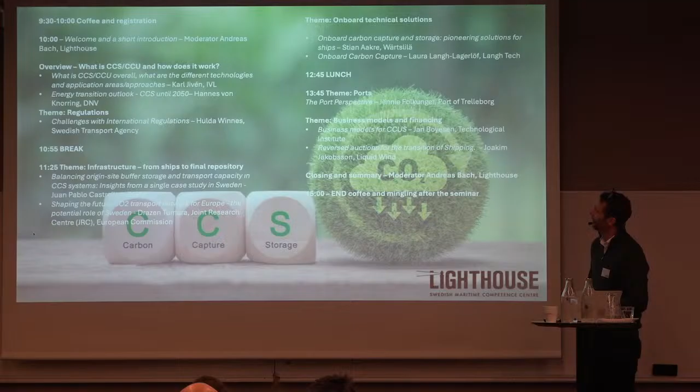I think this will be a really interesting day where we can learn about CCS, both on board and on land. The program today is we have 10 presentations, and in between there we will have some coffee and some lunch and so on. The coffee breaks and the lunch break are quite long, and that's because we really want you to talk to each other. Normally that is not a problem with this crowd, but take the chance to network and discuss with colleagues and so on. And if you get any great ideas, contact us.

So I think that's it, and we will just get started with the day. And first out is Kalle. And he will start with a short overview of CCS in the maritime domain. So please welcome up Kalle. He's already here, perfect. Kalle is a project leader and a researcher at the Swedish Environmental Research Institute, IVL. And Kalle is specializing in the transition of shipping towards sustainable fuels. And also Kalle is running one of the focus groups, fossil-free shipping, which you all are very welcome to participate in. So please go ahead, Kalle.

Thank you. What an honor to start this fantastic day.

So I'm a naval architect, and I've been working with the shipping transition towards more sustainable operations, fuels, and so on. But myself, as well as IVL, have also worked a bit with carbon capturing. Myself with carbon capturing on board ships, and we did, for example, a Lighthouse report that was released almost 3 years ago. And it was about the potential of onboard carbon capturing.

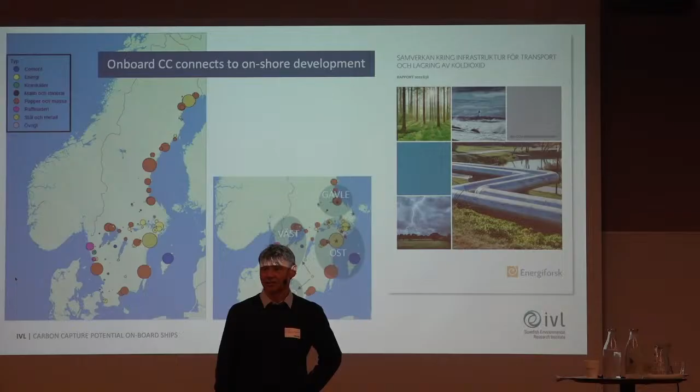If we're talking about the carbon captured on board ships, it would also make sense to look at the potential captured volumes for land-based systems. It would be very costly to build up systems just for the carbon collected on board ships, so you would probably want to find synergies with systems developed for land-based sources. There are already studies today about what kind of systems could be built up, making hubs within ports, and we know many ports are interested in looking at this.

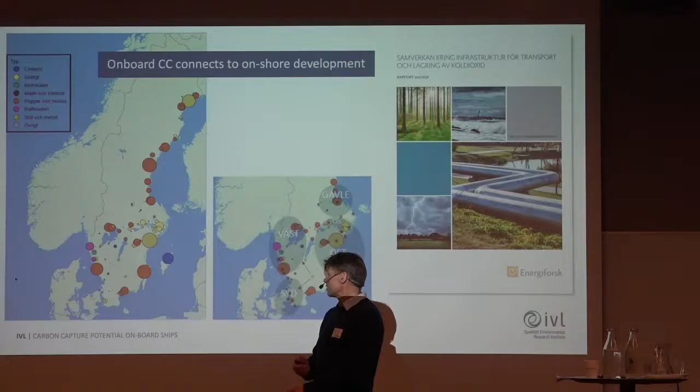Related to the technology, there are many different ways of collecting the carbon dioxide from the exhaust or combustion process. We could collect it before the fuel enters the engine - pre-combustion capture. We could have oxy-fuel combustion, where you burn the fuel together with oxygen, and out of the engine as exhaust you get almost just carbon dioxide, which could then be used. But the most common way is post-combustion capture, and the benefit is that you normally don't have to alter anything within the combustion process - you could use the same engines and just add something afterwards.

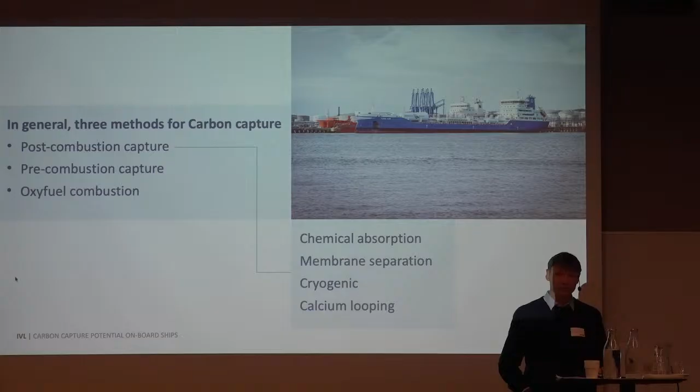But this could also be made in different ways. You could have chemical absorption, use a membrane, use heat exchange in a cryogenic system, or calcium looping. The most common or most worked-with system is chemical absorption, and then you often use some kind of chemical solvent like MEA, monoethanol amine - there are many others as well, which we're going to look at. You could say you scrub the exhaust, the solution captures the carbon, and then you release it in another step. The MEA solution is often used as a benchmark when comparing systems, and it's the most common and still used system.

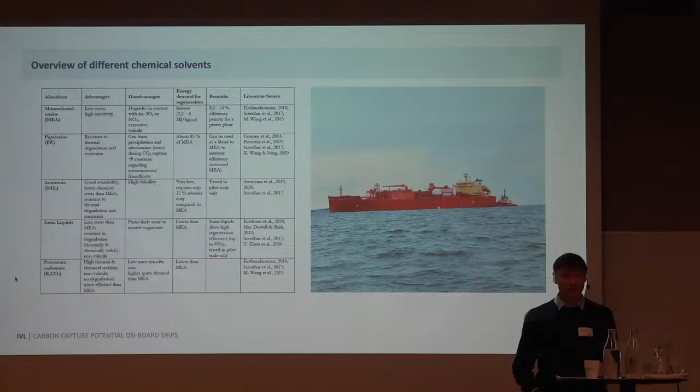But there are many, many other solutions as well, with different pros and cons. I'm not going to go into that, but some are more poisonous, some are more costly, some have better energy efficiency, and so on.

Absorption by solid sorbent and membrane technologies - you could, for example, use a calcium looping process. You have calcium oxide that reacts with the carbon dioxide, and then you get calcium carbonate that could be delivered ashore and used for other processes later.

Within cryogenic carbon capture, you take the exhaust gases below minus 100 degrees Celsius, and then you could loop out the carbon dioxide. It's actually this system that we found the most promising - you have the possibility of less energy used for the process, it might be the most economically feasible in the future, and it could also take up less space than other systems.

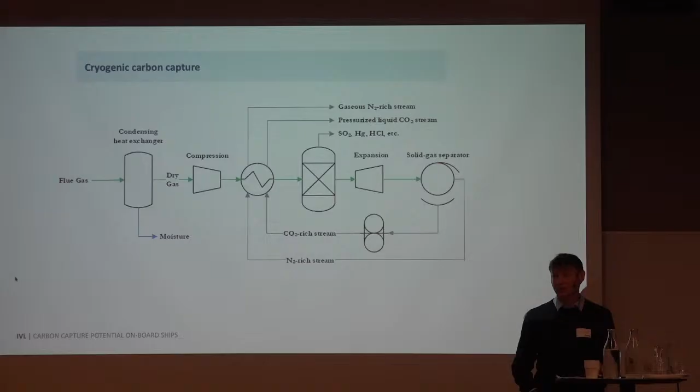Then you have pre-combustion, where Chalmers, for example, and Selma and other colleagues have looked a lot at within their HIMETH project, where you take out the carbon before the engine and then run the engines or fuel cells just on hydrogen.

Then you have oxy-fuel combustion, where instead of using air for the inlet to the engine, you use pure oxygen or a mix of oxygen and air. If you use pure oxygen and fuel in the combustion process, you will get almost just carbon dioxide out of the engine as exhaust, and then you could take care of that more easily.

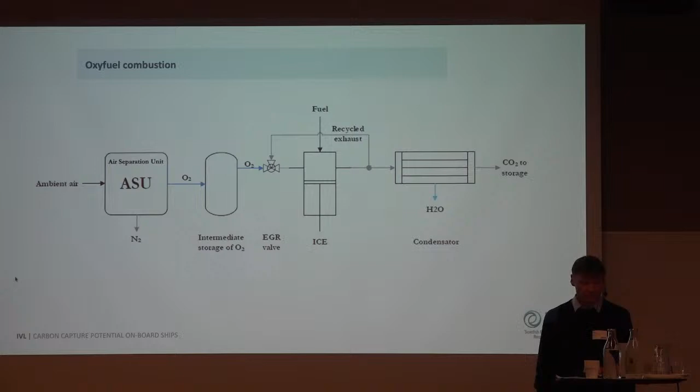And if the development of fuel production moves more towards e-fuels, such as hydrogen or e-methanol and so on, you will get a lot of oxygen from the production of hydrogen. That might be interesting to use within oxy-fuel combustion, so that could be a possibility as well in the future.

Why are we talking about onboard carbon capture? I think the main reason is that it's most probable that fossil fuels will be used on board ships for a very long time. And in order to meet future targets of decarbonizing the shipping industry,

Carbon capture is often seen as a prerequisite for meeting those targets within the models and so on. But so far, it's been very much pilot and test installations, but now we see some real installations. Langh and Wärtsilä will talk more about that later today.

The main challenge, as we see it, is still building up the logistical system for taking care of the carbon captured on board and delivering it ashore, or via a bunker vessel for carbon dioxide, delivering it either to another ship, taking it to a storage point, or ashore. This is maybe not so technically difficult, but we don't have the systems today, and we haven't really decided how the most efficient system looks like.

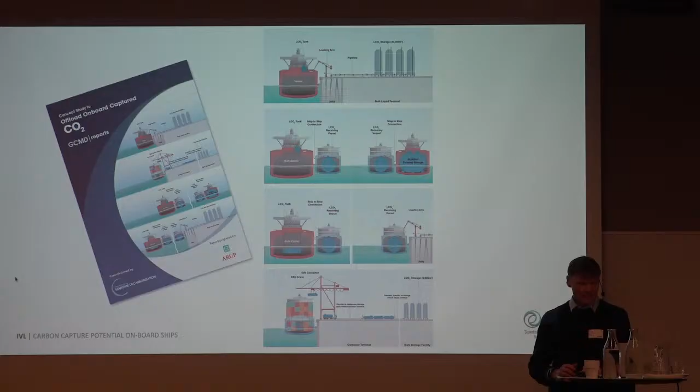As I said, we made up a scheme for assessing the different technologies on board ships, and that's still a valid method that could be interesting to use. We did some assessments 2-3 years ago, and we found cryogenic carbon capture the most promising, but of course chemical absorption and others are also a way to go forward.

We talked, for example, to Solvang, a Norwegian shipping company, a week ago or so. They have installed a full carbon capturing system from Wärtsilä on board their ships, and they are capturing about 90% of the carbon dioxide from their engines.

They also claim that delivering ashore is their main problem, that they need to find a good solution for. So, all in all, it's not a...

I think someone is calling here. And I'm not... Okay.

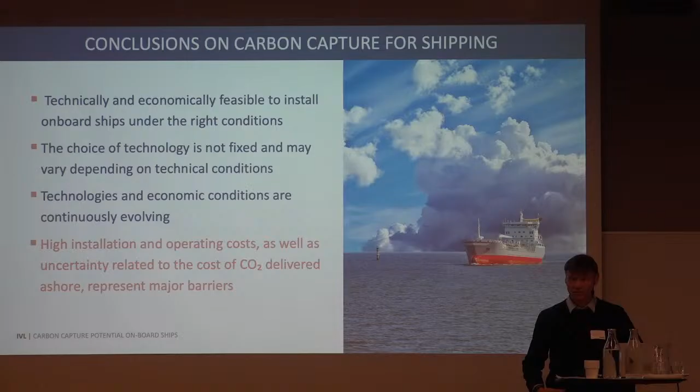As we see, the cost for onboard carbon capturing has been lowered over the years. But to make this fly, we probably need an efficient system for the logistical setup for taking the carbon captured from the ship towards the end use or storage. So I think that was what I had to say. And yeah?

I have a question here. Yeah. You have to... wait a second. Since we are streaming it, people have to hear clearly, so that is why you have to have a mix. Thank you. I can speak louder.

Can you in some way say, for example, if we have Stena Line ferry to Kiel, back and forth here, it's around 24 hours and around 800 kilometers, how much carbon is it you should take care of?

Roughly, you could say that if you burn 1 ton of fuel, like MGO or something like that, you will get 3.2 tons of CO2.

So if we look at the system on board, for example, the Solvang vessel, you could see the tanks on the deck. It's kind of a large system. Those containers or tanks for carbon dioxide, I think they would fit some 700 tons of CO2. But that is probably for a trip, at least from Europe to US or something like that.

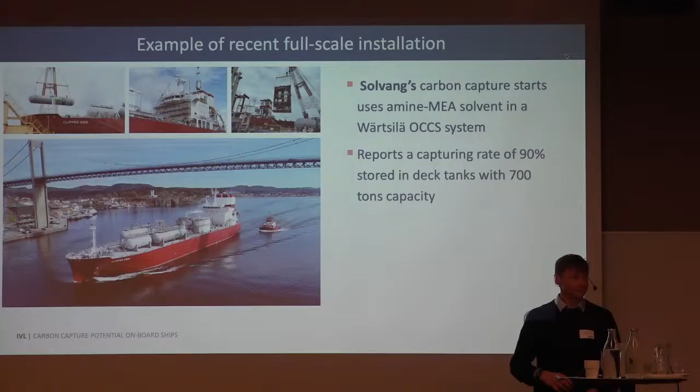Right. Yep. Thank you, Kalle. Yeah. Any more questions? Here we have one. Thank you, Kalle, I have two questions.

First, I wonder if you could say something about the energy demands for running, especially the chemical absorbent system, because I've seen estimates that say up to 40% of total energy is needed to reduce CO2 emissions by 80%, which is an extreme penalty, of course. And I also wonder if you have seen any studies that model future costs for getting rid of the CO2.

So the first question, it depends a lot on how you could integrate the energy balances between the capturing system and the engines.

How much excess heat do you have available from the engines and so on? And as I understand, there is a trend with some going for less capture rate, so you maybe just capture 10 to 30% of the carbon from the fuel or the exhaust, because then you could run the system more just on the available heat.

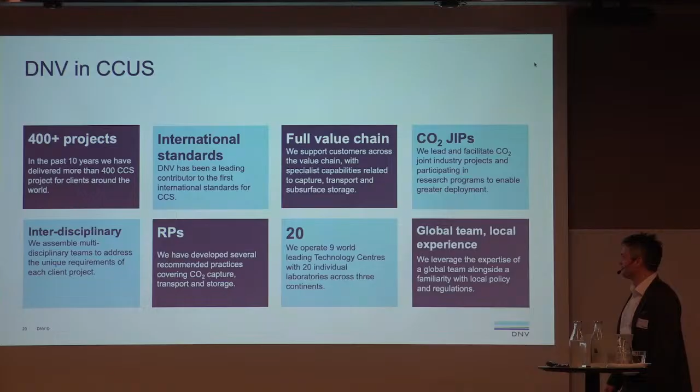We also have interesting a series of labs and technology centers where we can test things and break things, and have CO2 pipelines explode and all those exciting things, see what happens. On shipping, we are of course involved in class and advisory with current vessels in operation, and also the new vessels that are being operated out of the Northern Lights.

We're also working across the value chain on other pressure regimes. So if the current pressure regime is medium pressure, we're also working a lot on elevated and low pressure chains. And here are some examples of standards and practices that we are developing together with others on CO2 specifications, and also an ISO standard.

But I was not asked to talk so much about the technical aspects of CCS, but rather how does it fit into global decarbonization and maritime decarbonization. And here we have kind of a different set of expertise, and that is energy systems modeling. So we have a fairly large research group dedicated to developing and using models of the global energy systems to see how it will develop.

And specifically, this model is about making scenarios into the future based on current trajectories. And the latest forecast is that we are heading towards what can only be described as a catastrophe for many parts of the world, a global warming above 2 degrees. Even though we are now reducing emissions, expected to be reducing emissions rapidly, and even having negative emissions from mid-century, we are still overshooting this 2-degree budget by quite a large amount.

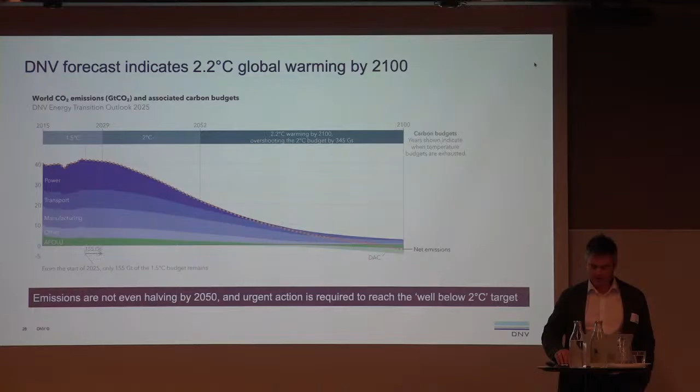So emissions, as we see in this modeling, doesn't even halve by 2050. A lot of things are expected to happen. We see a massive expansion of electricity coming from renewable resources, mostly wind and solar.

We're seeing a shift away from oil in the transport sector. So we have rail, maritime, road and aviation not dropping to zero by 2050, but still rapidly. In road, this will be mostly because of a large uptake of EVs. And in maritime and aviation, we will see different fuels and also carbon capture.

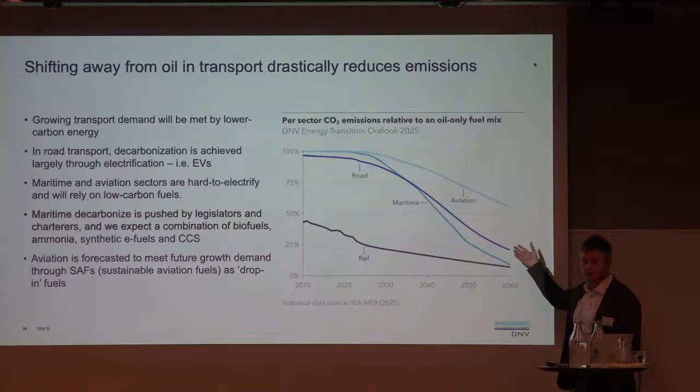So just a quick overview of the outputs of this model. What it also shows is a significant uptake of CCS technology. And this is just looking at the short term. This is not based off of modeling, but rather the projects that are in the pipeline. So whereas in 2024 we have around 62 million tons, we expect it to grow by a couple of 100% towards 2030, and then massively expand further to 1.3 billion tons CO2 annually by 2050. After 2030, this will be mostly in hard-to-abate sectors, like different manufacturing sectors, but also in maritime.

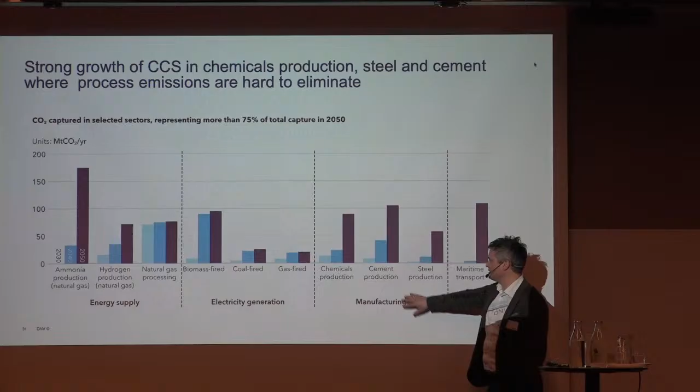So to the far left, we have different forms of ammonia and hydrogen production based off of natural gas. Of course, used a lot in fertilizer and in other parts of industry. We have a lot of biomass-fired plants being fitted with carbon capture, as is coal-fired and gas-fired, and then manufacturing, as we're seeing a lot in Sweden and elsewhere, on cement and also chemicals and steel. So these hard-to-abate sectors represent the larger share of these sectors which will be using CCS. So in this case, it is more than 75%.

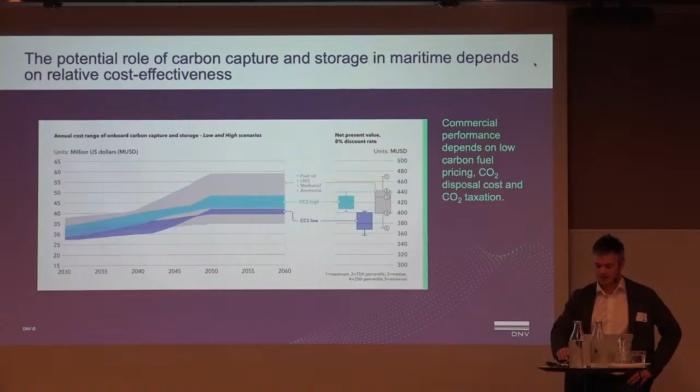But as we'll be discussing today, it is this connection between ships and the infrastructure that is already being built for land-based capture facilities, that shipping can piggyback off that development in the first stages. That will be crucial. Other than that, it is being well explored now. What do we have to consider?

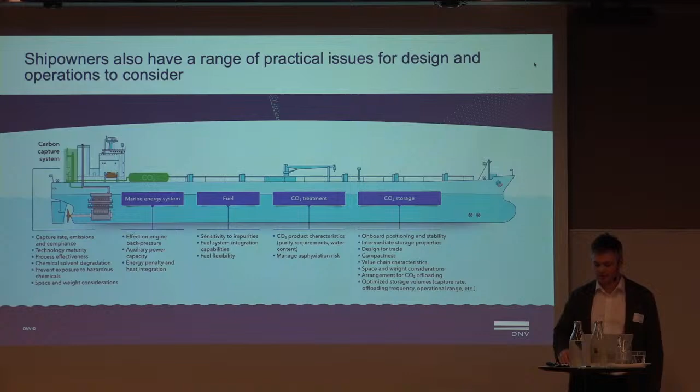So there are some questions about the Stena ferry, for example, and there are these assessments being done for most kinds of vessels on what you actually need to consider in detail. I don't have time, I realize now, to go through this in all detail, but there's a lot of research now that goes through different kinds of vessels and the different considerations that you need to take. And like Kalle mentioned already, available space, available heat, is it possible to integrate into existing systems, maybe there's even steam being produced on board that can be leveraged.

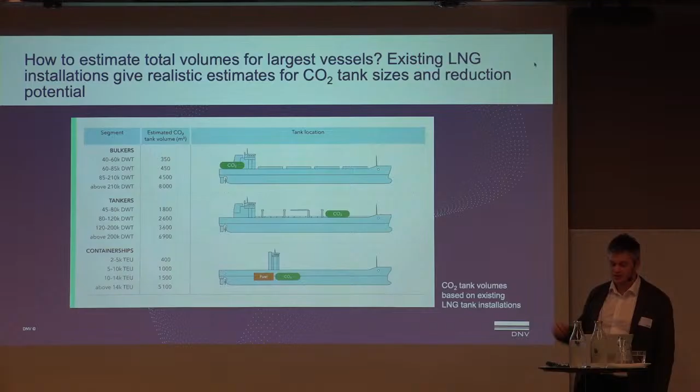And I want to jump a bit to the final estimation. This is one of those case studies where we look at what role CCS can play from a bottom-up perspective. Here we look at the largest kinds of vessels, large bulkers, tankers and container ships. We make assumptions on reasonable tank volumes for different ship types. And then, considering how these vessels operate, we can follow these vessels and estimate what kind of voyages they do, how much energy they are consuming and how much CO2 they can store.

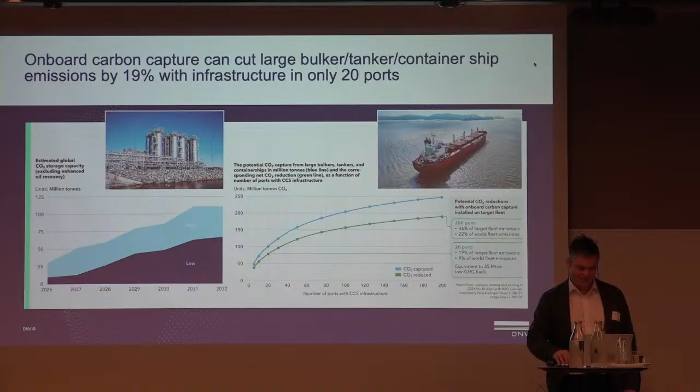And what we see in these simulations is that a very large part of particularly bulkers and tankers can actually carry their entire captured CO2 volumes. To a lesser extent container ships, because of the way they operate. And if you add these all together and look at the top ports and build up this infrastructure, here you can see the number of ports, the largest ports in order of size, and if you just pick the 20 largest, we could actually capture 19% of the fleet emissions. So depending on regulations, which we'll hear more about, I took those slides out, we can see CCS probably play a large role for ships.

So we've seen a quick overview of the role of CCS in global decarbonization. We didn't talk so much about it, but shipping is really what enables the CO2 infrastructure to be built up, and it will create entirely new vessel markets. Hundreds of vessels are being estimated in the short and mid-term. The early adoption on board will depend on the shore infrastructure, and with the right kind of regulation and supporting standards, we could see significant emissions cuts from CCS in shipping.

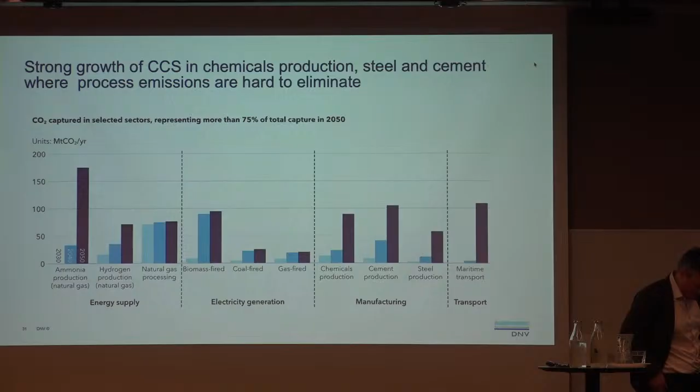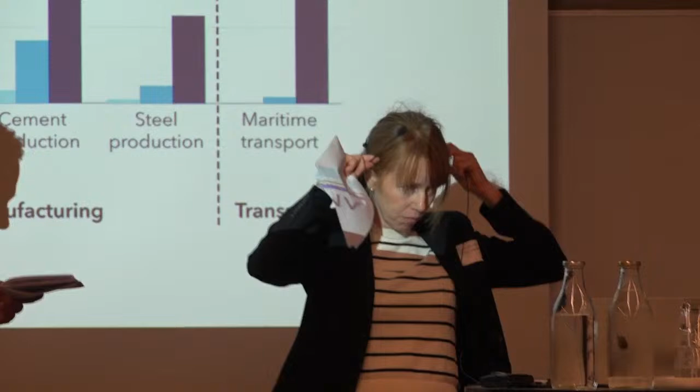So that actually concludes part one, the introduction part of today. And now we will hear from Hulda Vinnes about the challenges, which there are, I assume, quite a lot, of shaping the international regulatory framework. So, Hulda has a PhD in shipping and maritime technology and holds a position as an advisor on climate and environmental regulations for international shipping at the Swedish Transport Agency. Yeah.

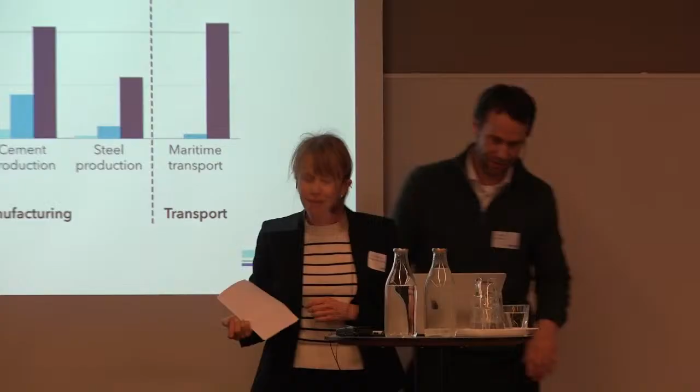Thank you, Andreas, and I'm happy to be here. Let's see if I can move forward to my presentation here. No? Hannes, what did you do? This is me.

I will try and give an overview of the challenges with international regulations on OCCS. So my presentation will be on OCCS and not on CCS in general. So the regulatory certainty is, of course, very important in order to give the industry a willingness to invest in these new technologies. We are well aware of that. And we are not really there yet, as I'm sure most of you know. The EU has come further than the IMO. And so for the IMO, I will try to give an update on how the discussions are ongoing at the moment.

But first I thought I'd just give a list of the different regulations which have or will need to have some provisions for the use of CCS. So we have EU and IMO regulations. And I will just go through them one by one as I see it. And we had a question on EU ETS before, but this regulation is not within the Swedish Transport Agency portfolio, but in the Swedish EPA. So I have had some information from my colleagues at the EPA, but I don't have the detailed knowledge.

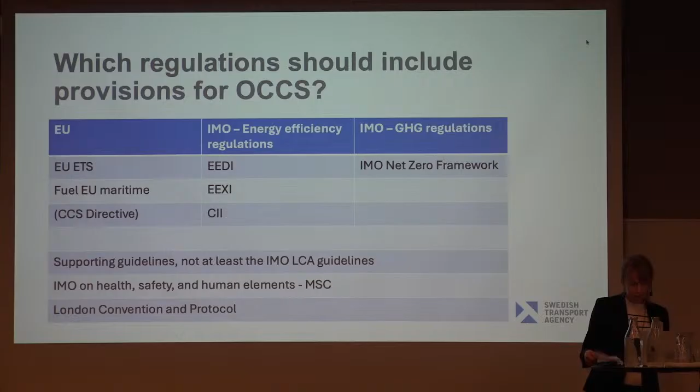So like I said, in the IMO there are ongoing discussions on the development of a regulatory framework, and most of those discussions take place in a correspondence group that has been active for 2 years. And that means that many member states and NGOs send representatives to have email correspondence on different issues. And this group is coordinated by Norway.

The explicit aim is to develop a regulatory framework for the use of onboard carbon capture and storage, so very much to the point. And it includes the objectives of avoiding harmful emissions to air and sea, consider legal barriers to the use of OCCS, transport and transfer of the captured CO2, facilitate access to reception facilities, enable recording and reporting of the relevant data, and develop options that take into account greenhouse gas reductions from OCCS in IMO regulations. So quite a broad spectrum of aspects that need to be discussed.

And the discussions are ongoing. There will be reporting to the next MEPC, which is in April-May, but this work is definitely not finished yet. As you can understand, there are many different views on how this should be done. So anyway, this group last year decided that the most important thing would be to develop guidelines.

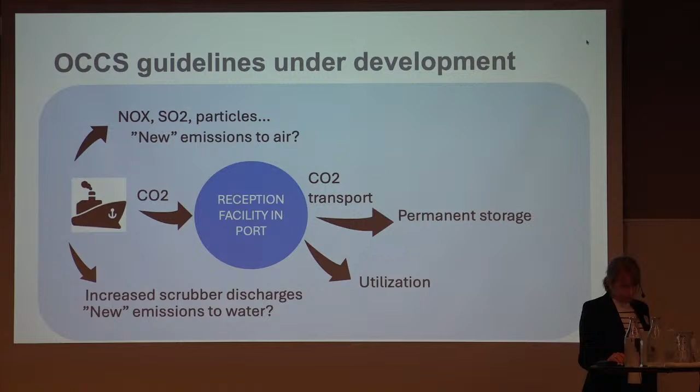It can be anything from type approval, technology neutrality, technology maturity, CO2 purity, and how that should be measured, the data needed for the LCA calculations, the monitoring of the CO2 slip, approval methods and criteria, documentation requirements, inspections and surveys. So definitely a lot of things that should go into these guidelines.

And further on the challenges, and this is definitely not a comprehensive list, but I've just listed a few of the challenges that we see and tried to structure them a bit, since the regulations should take a holistic view, of course. We have the carbon capture on board. If we get significant increases in fuel consumption, we have increased amounts of emissions to air and water of other emissions than CO2, of course.

There could also be new kinds of emissions that are not regulated this far and that need to be assessed in one way or another, a risk assessment. And of course, approval of technologies, I've already mentioned that, how that should be done.

The transfer to other ships or the reception facility, the amounts transferred need to be in some way documented and certified, and that applies, of course, for the value chain in total. And I mean, this is not specific for the ship industry, but the ship industry, as I consider it, is rather small scale and rather scattered compared to what has traditionally been used in CCS.

I'm not 100% certain, but I think this would require more from a regulatory perspective, because we will need to handle many different document streams certifying that the value chain is intact. Of course, permanent storage or usage needs to be certified, and this is very important. And then the emission accounting practices in the regulations can be very difficult to solve. I foresee this, but the discussions are starting.

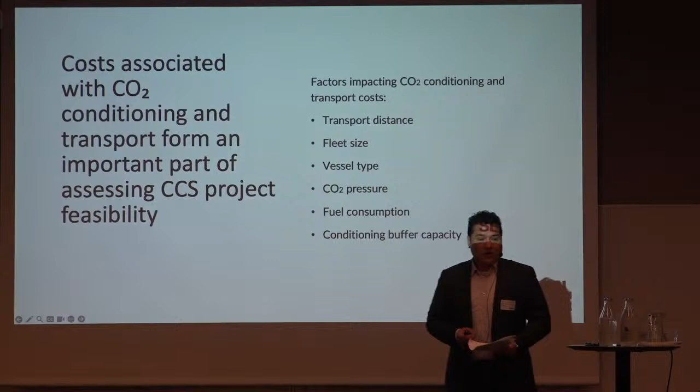And what I'm going to present today is one of those initiatives focused on a specific case in Sweden, which for us is very important to put the logistics aspects on the agenda of CCS and not as an afterthought. Because there are aspects that definitely will determine the feasibility of the carbon capture and storage systems related to the location, of course, of the storage sites, the distance from the emitters to the final location, the type of fleet that is going to transport that CO2, the different types of vessels,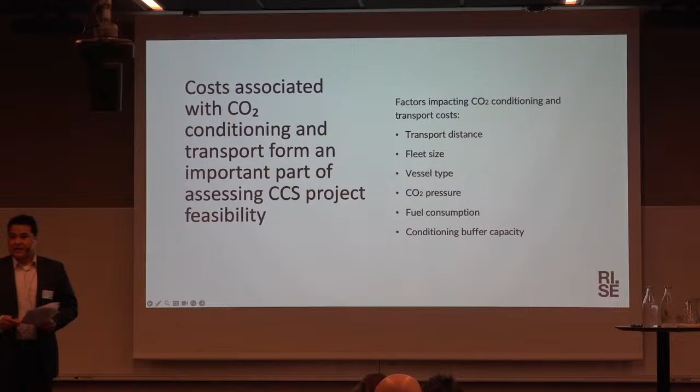the conditions that the CO2 is transported in, the fuel consumption, of course, and the conditions at the emitter side, what infrastructure needs to be there to store the CO2 temporarily. Those are aspects that we analyze in this project, called Logistics System for Cement Industries' CO2 Capture and Storage. This project started in 2023. We are about to finish, and this is a partnership between RISE and Heidelberg Materials, acknowledging the importance of CO2 capture for the cement industry. As Hannes mentioned before, it's one of the sectors at the heart of this.

It contributes around 5% to global emissions, and 4% in the case of Sweden. Carbon capture is definitely on the agenda for this sector. The purpose of the overall project is to increase the understanding of how a cost-effective, reliable, and environmentally sustainable CO2 logistics system for carbon capture and storage can be designed for the cement industry in Sweden.

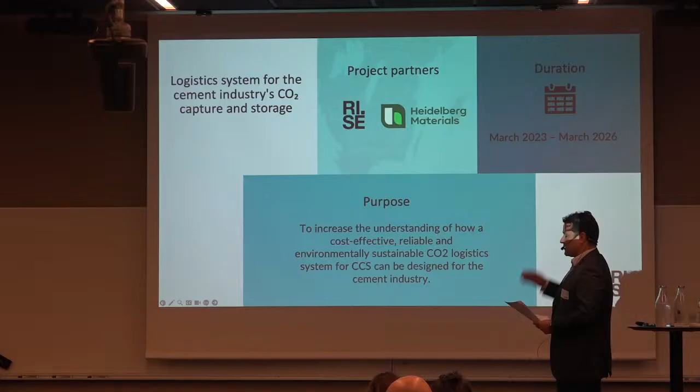The project is led by Sarah Kilikasland. She couldn't come unfortunately, but we are a group of colleagues here. Johan is in the room, also Christian, and more colleagues at RISE studying these aspects.

The project has several work packages related to the review of the literature available on carbon capture, transport, and storage, and all the different actors involved in this logistics system, including ports, logistics operators, and of course the emitters, and the regulations around that and who takes part in the decisions.

I will talk specifically about work package 3, which is the design of the logistics system - meaning how to make decisions about the fleet, how many vessels are needed to transport the captured carbon, the size of those vessels, the technology that could work or not for the specific case, and the storage on site. I'll explain that in more detail later.

We have work package 4 related to the development of the ship design, the technical requirements for those ships, and Johan is part of that package. It's an iterative interaction, because those parameters inform the model we developed for the logistics design. Then there are implications for the different stakeholders in the system, and of course project management and communication.

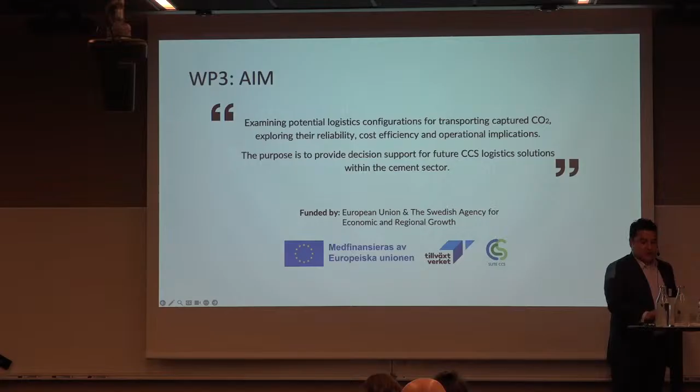There are several options to transport the carbon from the emitter side to the sink, including pipeline solutions that have been studied in literature, and we have some figures about cost and feasibility in the case of the Nordic countries, which isn't that clear so far, but the recommended mode of transport for this kind of operation is shipping.

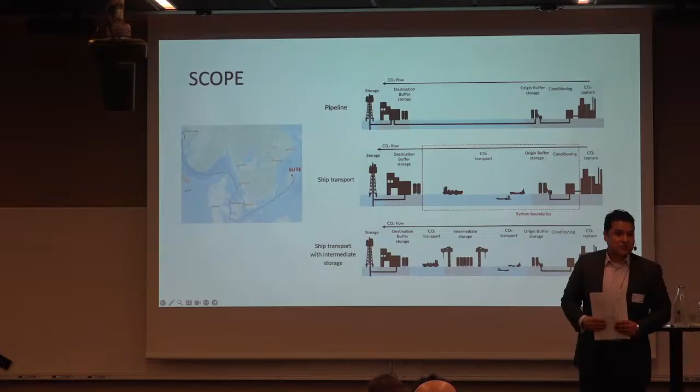In shipping we have different solutions or options: direct transport from the emitter to the storage site, or transport using intermediate storage sites like ports, for instance, that consolidate the carbon from different emitters and then transport the consolidated carbon to the storage site.

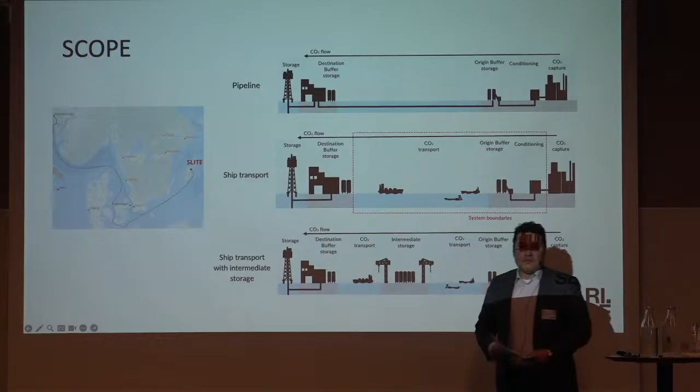We consider this system as a baseline for the company to base future decisions on, to be able to compare what happens if they perform the operation themselves, and then later compare with other possibilities with logistics providers that can perform the loading, unloading, and transport.

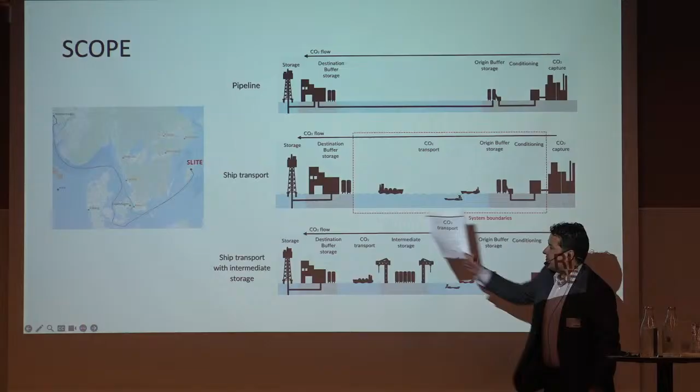So this is the option we explored, and this is the flow - it relates to the map. Here we have the plant, the tanks for temporary storage of the CO2, the transport by ship, and finally the sink in Norway. These are the boundaries we explore for the logistics system.

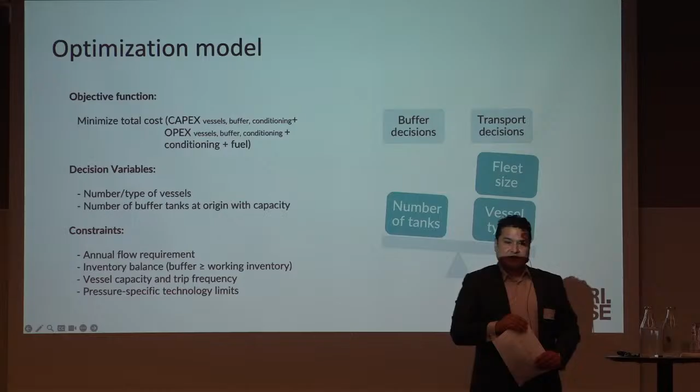When I joined the project, I realized this is a classic logistics problem of trade-off between storage capacity and transport capacity. If we have many vessels, we need less temporary storage at the origin, because they come more frequently and we can evacuate the CO2. If we don't have that many vessels, then we need more storage on site, because the vessel will go back and forth and take time while we have to store the CO2 there.

Otherwise, the company will be forced to emit that CO2 because it's not able to store it. So that's the problem that we are solving.

Okay, what is the balance? How many tanks on site and how many vessels so that we equilibrate the system and get an optimal solution, based on different aspects related to the capex of the vessels, the tanks that will be used, and the cost of conditioning, the capex of conditioning. Also the OPEX, the operational expenditures for vessels, buffer, and conditioning, the cost itself of the conditioning process, and the cost of the fuel assumed to be used in the ships.

The decision variables are mainly two: how many vessels, what size the vessels should have, and the number of tanks needed at the port for waiting and temporary storage while the next ship comes to unload the carbon.

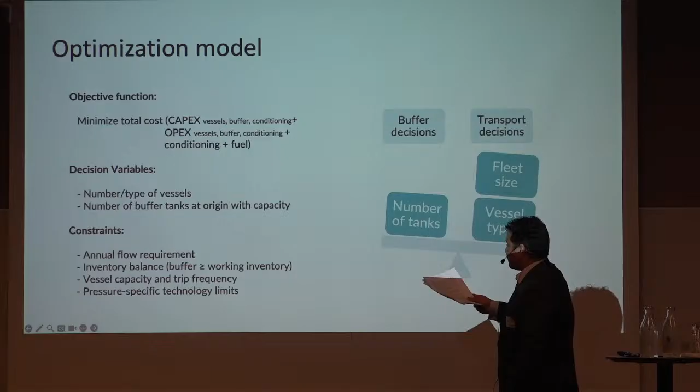There are some constraints. The first is that we have to meet the expected amount of carbon the company is planning to capture, so this annual flow requirement. There should also be an inventory balance, since the tanks have a fill level and a maximum capacity of storage. They cannot be lower than 5% utilization and no more than 90% utilization. That's a technical constraint.

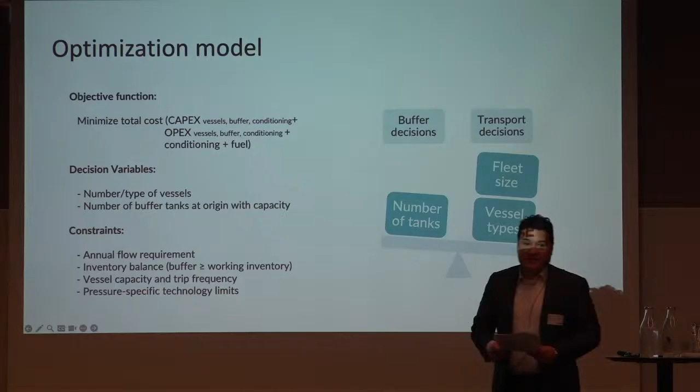Also the vessel capacity and trip frequency, so it has to meet the flow we got from the company, this frequency and the size depending on the amount of CO2 that needs to be transported. And finally, the constraints related to pressure-specific technology limits, related to the density, whether it's medium pressure or low pressure liquefied carbon.

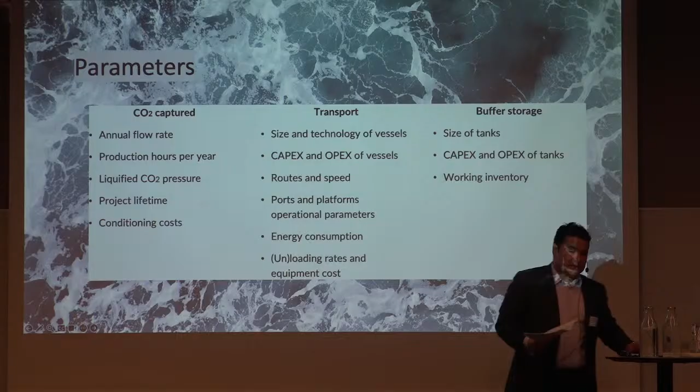The model has several parameters, more than 40, related to the CO2 captured, as I mentioned before, then the transport and the buffer storage. Actually, the model itself is a classic model in logistics, but the challenge in this case is related to the uncertainties those parameters have, because we are still in the process of developing or seeing how other actors develop new ships, new technologies for capture or for transforming or liquefaction of the CO2.

Also related to infrastructure, if there will be hubs that consolidate the CO2, where the ports will be located. Also uncertainties about the contracts, for how long the storage will be available for the company, what size, what is the requirement regarding the pressure of the CO2, and the policy and external settings, as we heard before. So there are many uncertainties in the model, which makes the case challenging.

And that's why, with this project, we identify the specific parameters for the company and try to estimate the optimal design for the logistics system.

This is the type of results we get from the model, which allows us to make a sensitivity analysis based on the annual flow, annual CO2 captured, and how many vessels the system needs—whether a vessel of 7.5k cubic meters in capacity, or 12,000, or 21,000. So it's regarding the capacity of the vessel: how many vessels, if we are capturing 1 million tons per year or 2 million tons per year, and whether we need only one type of vessel or a combination of them, alongside the number of tanks needed on site.

I hide the numbers intentionally because this is something we are still validating with the company and internally with our team. But this is the type of analysis the company can use to adjust different parameters based on market conditions, and then assess the final logistics cost per ton in their system.

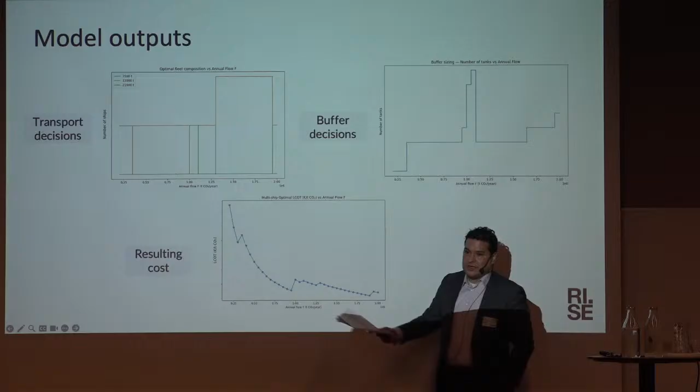And also adjust the decision even in terms of the capture, so they avoid a local optimum—where a small effort in the level of capture could get more efficiency. So overall it's a tool for decision making related to the number of ships and tanks needed for the operation.

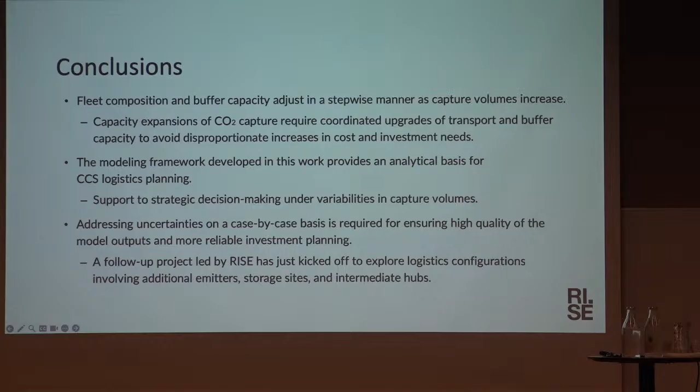As a conclusion, with the model it's evident that decisions about investment in the logistics system have to be equilibrated. If we make changes in the annual flow captured by the company, it requires coordinated upgrades in the fleet and coordinated updates in the investment needed for the tanks.

The modeling framework provides an analytical basis for the company, also to compare with other solutions, offers from different logistics providers, and offers from different technologies that could come in the future, understanding that there are ongoing efforts to update different technologies and solutions in the sector.

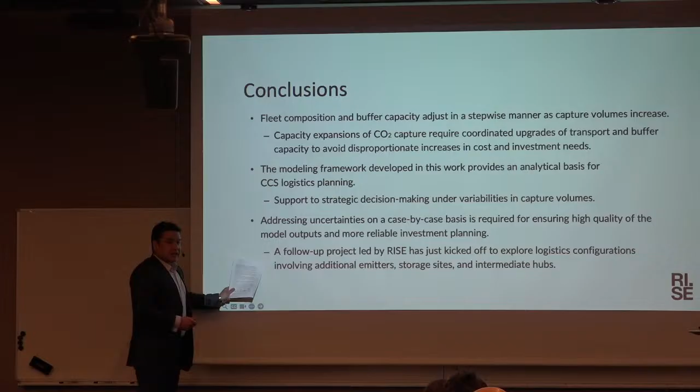Regarding the uncertainties, this is one of the biggest learnings—we need to understand case by case what the conditions are. We're not talking about emitters that are inland who may need to transport CO2 to the port, with different transport options that need to be included in the model. We didn't include intermediate locations like ports that can be hubs for capturing and consolidating CO2. Those are options we will study in a follow-up project, as Carl mentioned, which just kicked off, where we'll explore different alternatives including different storage locations available in the Nordic countries.

So that's overall the presentation about our project. Thank you very much, and I will be happy to answer your questions, and also count on RISE as a logistics team for providing this kind of tools and assessing the systems that are out there in this chicken and egg dilemma—who goes first? We are putting on the table this logistics tool, so on-the-go decisions can be updated based on what is happening in the market.

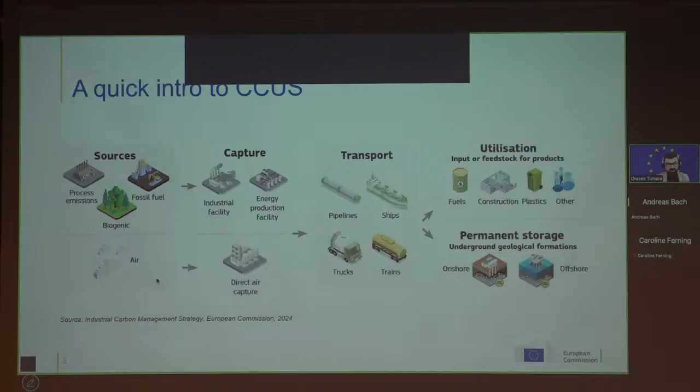So I'll switch to the next slide, to the European Commission's policy context and status related to CCS. The policy landscape has evolved significantly to support deployment of CCS. We've moved from the initial CCS directive in 2009 to more recent milestones like the EU Green Deal and Net Zero Industry Act. For CCS, the recent important Commission publications are the Industrial Carbon Management Strategy and the 2040 Climate Target Plan, which both emphasize the potential role of CCS in the Commission's aim to transition to a low carbon economy and to become carbon neutral by 2050. Looking ahead, we expect new legislation targeting CO2 markets and infrastructure in the second half of 2026.

When it comes to the activity of my unit, we have a long history related to CCUS, and our team is still very active in this area. We are covering the entire CCS value chain. We have many activities, and one of them is the Clean Energy Technology Observatory, or as we shorten it, CETO. This is an in-house Commission project that monitors research and innovation while assessing the competitiveness of the EU's clean energy sector, and we look at everything from technology readiness level and patenting trends to value chain analysis and global market positioning of EU companies and many more.

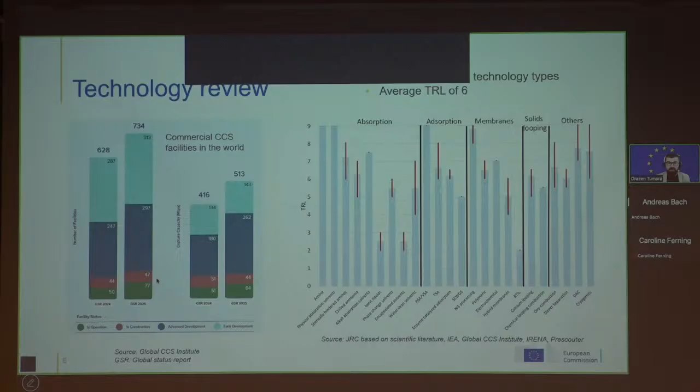European companies are already strong players in this field. For instance, 7 out of 22 companies with commercially available capture technologies are based in the EU, including leaders like Air Liquide, Linde, and Shell. We see similar European representation in transport and storage, again companies like Linde and TotalEnergies. But what we can see here, and this is maybe related to Sweden, is that there are no Swedish companies based on our analysis. If you have different information, it would be good if you can reach out to us, so we can include that in the next version of our report.

The European Commission's projections related to CCUS are based on extensive energy and climate modeling, and they show potential for a massive increase in CO2 capture, transport, utilization, and storage by 2050. While much of the CO2 will go to underground storage, the projection also expects growth in utilization, for example synthetic fuels and materials, and in the construction sector. But the key sector contributing to the deployment of CCS technology is energy-intensive industry, with sectors such as cement and chemical industry, where there are no alternatives to CCS when it comes to decarbonization.

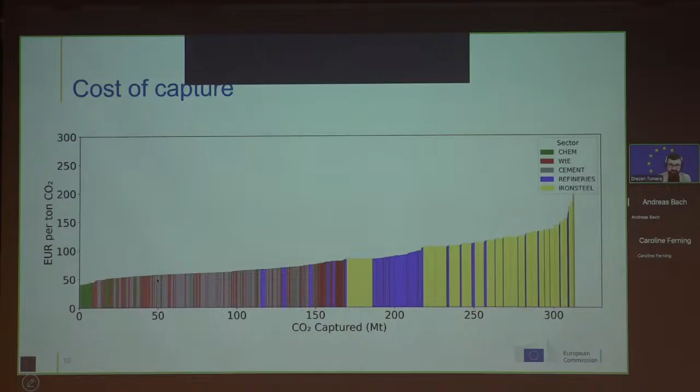But our goal is to assess the entire CCS value chain, and in addition to capture data, we need to have more information about potential CO2 storage sites that we can use now and, of course, in the future, because we are looking until 2050 and even 2070. As well, we need to know the location of potential storage sites, but also their storage capacity that is available to us soon and later.

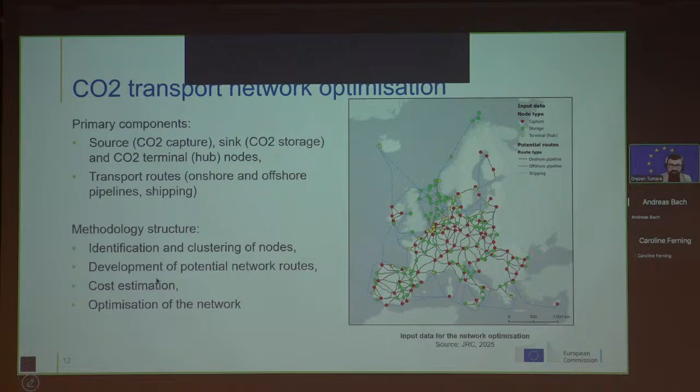You can see here the identified capture nodes based on EC's projections and announced projects, but there are no data on storage potential, like I said before. And with the legal problem of storing CO2 in the Baltics, the option for Sweden is to transport CO2 via shipping to store it offshore in the North Sea or via onshore pipeline. However, based on the announced projects data, it's reasonable to assume that shipping is more likely to be used, at least in the beginning of the CO2 market development.

But in general, our view is that the development of CO2 pipeline infrastructure, not just in this region but in the whole of Europe, could be challenging during the early phase of CCS deployment, and alternative forms of CO2 transport, such as shipping, should be explored. Based on the announced projects, it's realistic to expect that a significant part of CO2 transport will take place through alternative forms of transport to the coast via rails, roads, or even rivers.

And this will be followed by shipping to offshore storage locations, which make up the majority of the CO2 storage capacity. For shipping, in addition to shorter lead times compared to pipeline construction, it is really important that shipping offers flexibility, and this could be crucial in the early phase of network development. Then with further development of the CO2 market, there could be significant progress in CO2 transport via pipelines, since in the long run it is cheaper. But definitely each case should be analyzed on a specific cost basis.

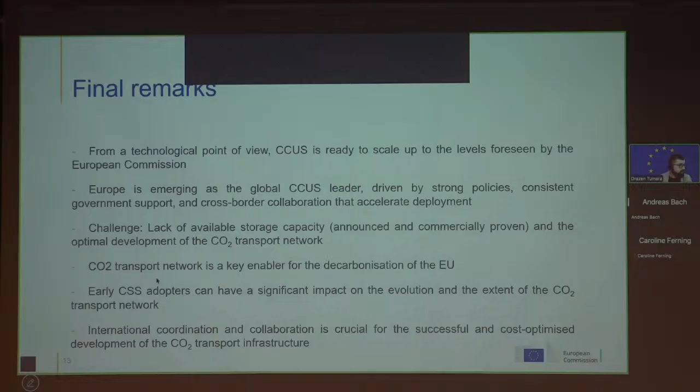But again, international coordination and collaboration is crucial for successful and cost-optimized network development, deployment of CCS technologies, and the successful cost-optimized decarbonization of the EU. And with that, I'd like to finish the presentation and thank you. If you have any questions...

Thank you so much for that. Do we have any questions? Yeah, you need a mic because otherwise Drazen can't hear you. I can hear you, but the sound is not the best, so if you can use the mic. All right, I will. Perfect. Let's see if this works. Go ahead. Takes a couple of seconds before it wakes up. No problem.

Thank you so much for the presentation. It was great to see this large-scale overview of Europe. You showed us a slide indicating cost of carbon capture depending on the capture amount, I think between 50 to 100 euros or something. In your view, how does that capture cost compare to the total cost, including logistics and storage or utilization?

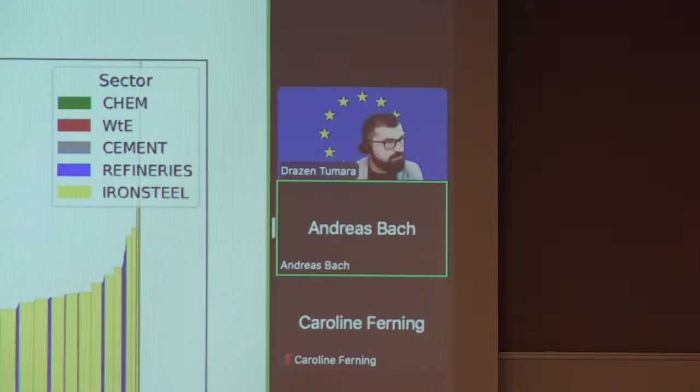Yes, thank you, Drazen, for the presentation. Very interesting. I have a question: you show maps and storage sites and capacity, and I wondered, since they are quite many, do you include enhanced oil recovery in these? Just for a clarification. No. In general, the Commission's view is that EOR shouldn't be, let's say, supported by the Commission because it generates more emissions, let's put it like that, in the process.

Thank you. Yeah. But when it comes to storage capacity and identifying potential storage capacity and locations, we are taking everything into account. The colleagues that were part of the GSEU project also took into account, of course, the hydrocarbon fields, because with time they will be depleted, and some of them are already depleted. All right, great, thanks. Sorry, there is another question. Okay.

Thank you, Drazen. I'm Sarah from the Swedish Energy Agency. I have two quick questions, I hope. One is, for your infrastructure, if you're considering which quality of CO2 and pressure and so on. And my other question was if the Net Zero Industry Act reporting feeds into your database.

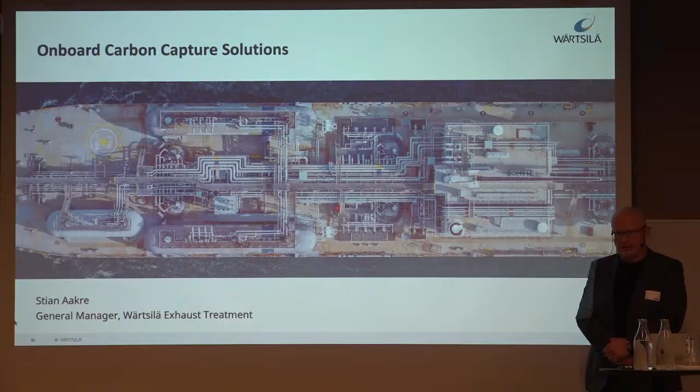Thank you, Anders, and thank you for getting the company almost right. It's very nice to be here. You have heard from a lot of very clever experts. I'm going to stay very practical and tell you about the vessel that has already been mentioned, Clipper Eris, what we call the world's first full-scale CCS system. And by full scale, we mean that we capture as much CO2 as possible from all exhaust sources on board the vessel. That means main engine, auxiliary engines, and boilers.

But first, allow me a couple of words on my company. Wärtsilä, we are nearing 200 years of age. We are located around the globe, as you probably know. We are also located here in Gothenburg, among other things, with my colleague Lars. I'm located in Norway, where we have our exhaust treatment facility, and that's where we developed the CCS system that is now out sailing.

Very quickly, as mentioned, we boldly call it the world's first full-scale system. It captures 50 tons per day from this vessel. And there was also a question about these tanks earlier. They are able to accommodate about 800 tons of CO2, making it possible for the vessel to capture as much CO2 as possible on a transatlantic voyage, for example.

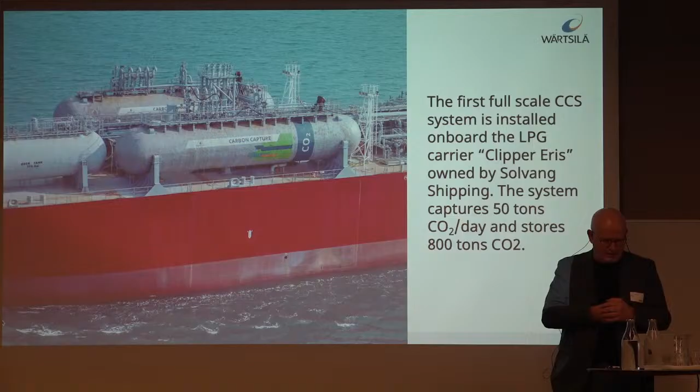We have chosen our solution as of today. You'll hear a slightly different version a little bit later. The regulation is, of course, key. No one will do this unless they have to, in one way or another. So we are trying to influence those processes. And then, of course, there has to be a business case in the future for this to work. There was a question about the cost, and it was also mentioned by the previous speaker.

We are also in the same vicinity when we calculate the cost of a captured ton of CO2 on board a vessel with the capex and the opex. We are also around 50 to 70 euros per ton, or dollars if you like. That's the CO2 captured and stored on board. Then comes the final fate of the CO2, whether it is sequestration or utilization. And how much you have to pay for that is of course also part of the business case for the ship owner.

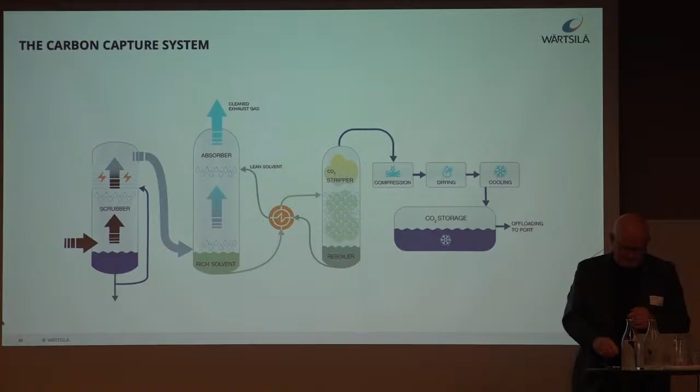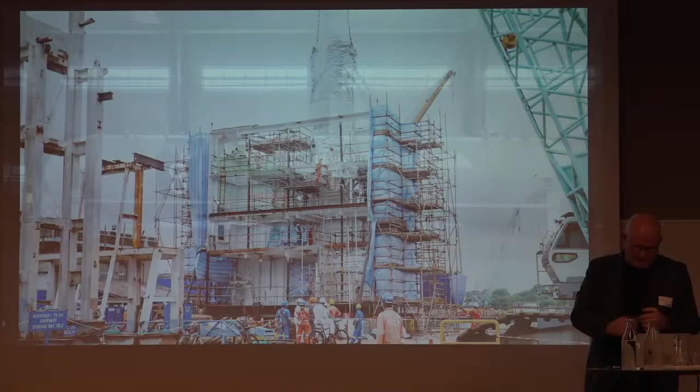This is during pre-commissioning or pre-construction of the backpack. It's finalized in the yard before the vessel arrives, then lifted on board along with the tanks you can see. They accumulate quite some size. They are made in China in this case, and lifted on board the vessel. So it actually is possible.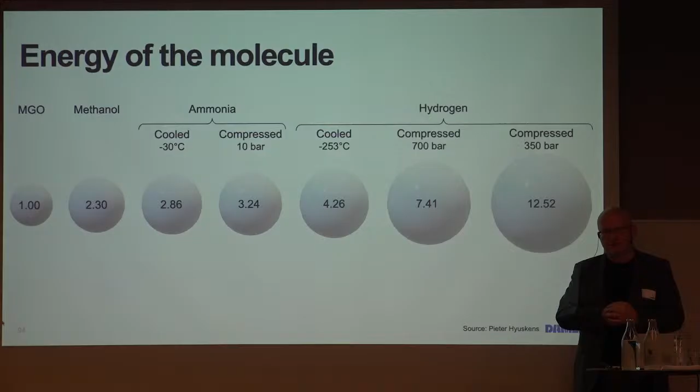And then you could, of course, say, well, I'll go for batteries. Good luck with that.

I mentioned EGR. This looks like a shotgun plot. I'm nearing the finish here now, Anders. So just showing the performance of the CCS system while we were commissioning. That's why it's all over the place, we were tuning and tweaking everything.

But then you can see in the circle, when you do EGR for NOx compliance, you are basically increasing your CO2 concentration in the exhaust. You are reducing the exhaust amount on the ship, thereby improving the carbon capture performance of the same system. That's very favorable. Typically operators will only use their NOx abatement technology within the NOx ECAs, so you are not necessarily benefiting from that all over the world.

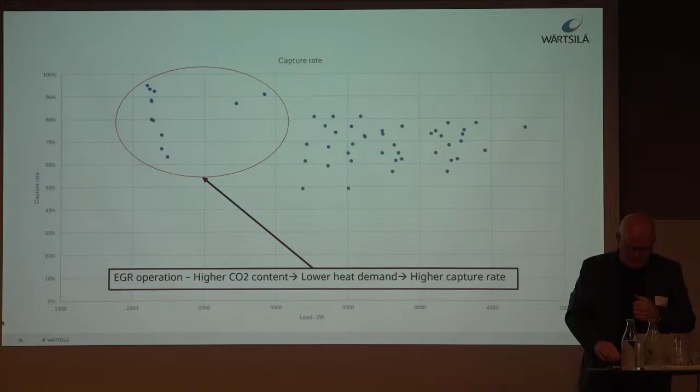When we were looking for various alternatives to do carbon capture, this idea of using caustic soda, which we already knew from closed loop scrubbers, became the choice, because with amines the energy consumption is huge, and here we could manage with lower energy consumption. Also, caustic soda is already available, and the logistics for caustic soda supply already exist in the ports because it's supplied for closed loop scrubbing.

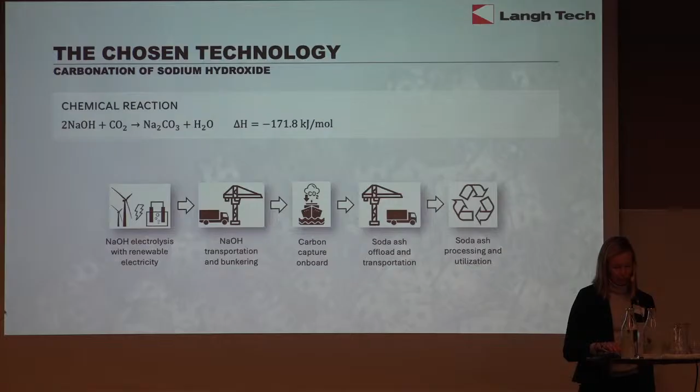Also the reaction is quite interesting. When CO2 reacts with caustic soda, it forms what we all know as soda ash. Luckily, the EU has confirmed that doing carbon capture by turning caustic soda into soda ash is counted as chemically permanently bound. So we have an EU proven solution there.

Here are a few areas where soda ash can be used. In our case, the vessel operates in a liner service between North Finland and the Netherlands. The volumes are of course very small at the moment; we are just testing and piloting. Due to the fact that it's not possible to get any advantage in the MRV reporting, we are not running the system continuously, just for testing purposes at the moment.

But there is a waste-to-energy plant in the Netherlands, very close to the port where this vessel calls every second week, in Terneuzen. We are now cooperating with this waste-to-energy plant, and they use soda ash for their own exhaust gas treatment again. So this has become a quite good loop for the logistics of the end product from our vessel.

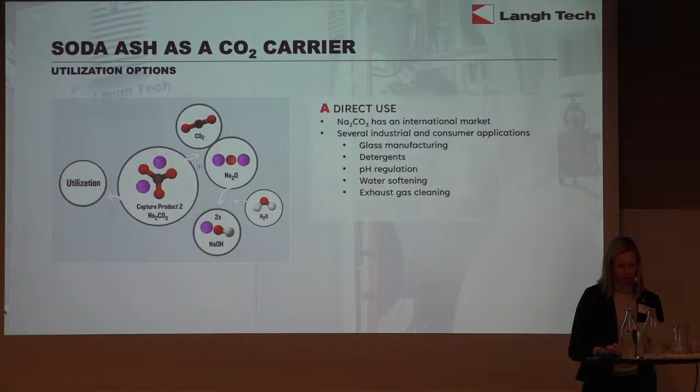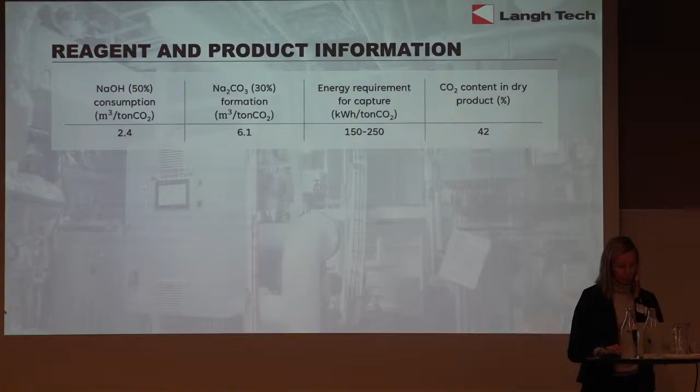Here are some other areas where soda ash could be used. Regeneration could also be one option, but it's much better to find ways to use it as such, because for regeneration the temperature needs to go up to 650 degrees to get it separated. Okay, now we maybe have all on that slide in place.

Maybe a little downside of using caustic soda is that the volumes you need to store on board after the capture process are much bigger than if using amines. The positive side is much lower energy consumption, since we don't do any separation on board. You can see how much caustic soda is needed: 2.4 cubic meters for each captured CO2 ton. We use 50% caustic soda delivered on board, and dilute it further with water. That's why the formation of soda ash is 6.1 cubic meters for each captured CO2 ton. The energy consumption is mentioned here too.

Maybe it gives an easier picture if I describe it in terms of 20-foot containers. What we manage it with is 5 20-foot tank containers on deck, for the roughly 4 days sea voyage from North Finland to the Netherlands. These containers are used in double duty - they can be used both as caustic soda storage tanks, and once the caustic soda is used in the process, they function as storage tanks for the soda ash.

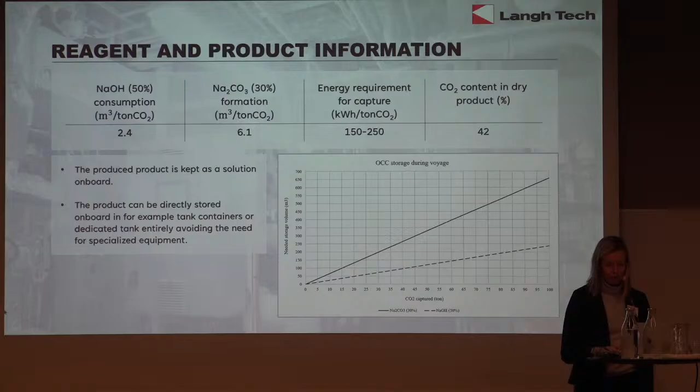The vessel has roughly a 6 megawatt main engine, and we are not doing an extremely high percentage of carbon capture. We were restricted partly by the component sizes that can be fitted on board, so we take only half of the exhaust gases into the capture unit, and there the capture rate is 50%. So what we have managed with caustic soda as the chemical is a maximum 50% capture rate, and since we treat only half of the exhaust gases, the end result is that roughly 20-25% of the CO2 is captured.

For the carbon capture process, we need the exhaust gases to be cooled down. That's why a scrubber or some other cooling of the exhaust gases is needed before the process. I guess it's the same with amines also, that for the reaction the exhaust gases need to be cooled down.

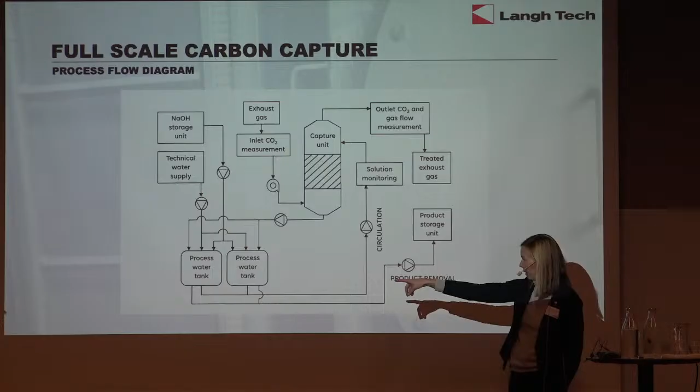We have 2 tanks and keep circulating the same batch of water until the batch is saturated, not reacting with CO2 anymore, and then simply swap it to the other batch. The tank is then filled with fresh caustic soda and water during the time when it's operated from the other tank, and the saturated tank is always emptied to the tank containers on deck.

And there is, like in a SOx scrubber system, a CEMS measuring the CO2 content before and after the capture unit. Caustic soda and water are supplied into the process tanks.

As mentioned, with vessels using heavy fuel oil having a scrubber, it's an advantage that the exhaust gases are already cooled down. With low sulfur fuels, some cooling of the exhaust gases would be needed, so that we get the exhaust gases roughly to 70 degrees, which is ideal for the carbon capture reaction to happen with caustic soda.

Here we were talking also about the cost. I can mention that we have quite a good balance: buying the caustic soda and selling the soda ash is OPEX-wise roughly the same cost. So at least in today's market, the OPEX is almost zero. Of course, you have logistics costs and such, but the ton price of both is roughly the same.

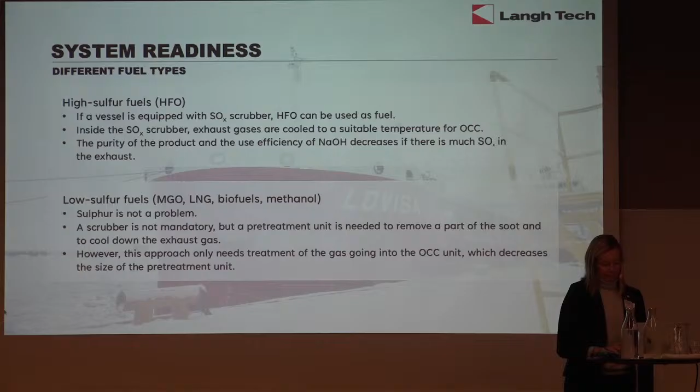And we spoke about carbon capture in the sense of, does it prolong the use of fossil fuels? But our opinion is that no, absolutely it doesn't, because nothing restricts using carbon capture also if you are burning biofuels. If we are aiming for zero emission vessels, we should actually combine carbon capture with use of biofuels or green methanol, whatever is the greener fuel compared with fossil fuels.

Now I exceeded the 1 minute already into the lunch break time, so I'll end here. If you have some questions, maybe we have time for one or two, but it depends on how hungry you are. I think there will be a question or two, but first of all, thank you so much. Thank you.

Do we have any question? No, crystal clear. So we're talking a lot about technology, rules and regulations and so on, but what is the comment from the crews on board? Maybe you have some experience from the crew on board. There's a new system that they need to learn, and are there any safety issues and so on?